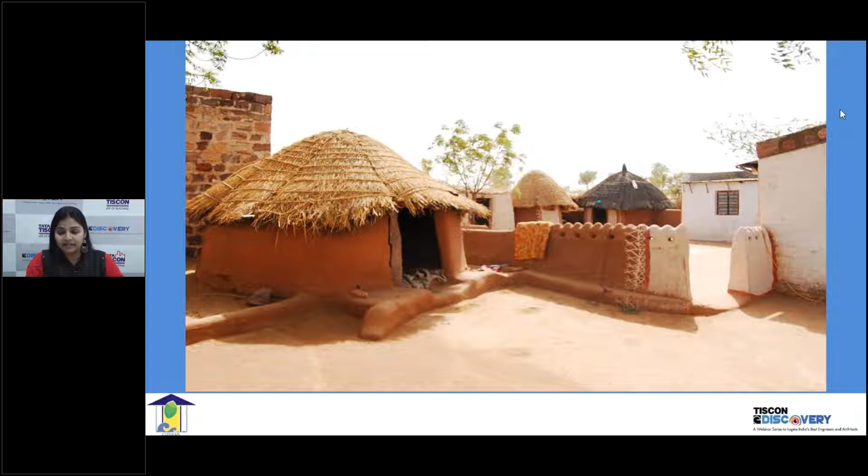These are our modern architecture buildings. We are taking time to identify this because of what you see here. If you look at the previous image, and I say that Hawa Mahal is probably in Srinagar, you will say that I've gone out of my head to say that. Unlike for this building, we can debate for hours saying this is from Mumbai, Sri Lanka, Singapore, any place. Let's go inside today and see whether these buildings are really comfortable or not.

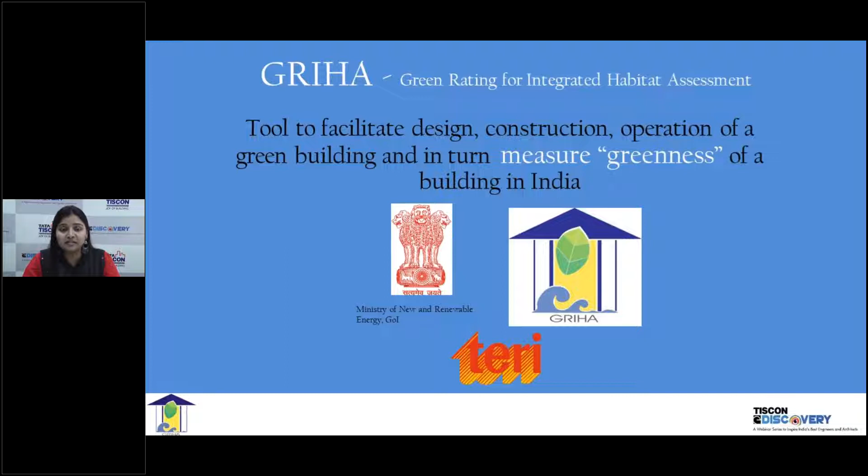When we conceptualized GRIHA, we based ourselves strongly on the existing codes and bylaws that we had. TERI, the Energy and Resources Institute, had conceptualized this rating system, GRIHA. GRIHA stands for Green Rating for Integrated Habitat Assessment. Basically, it is a point-based rating tool that will help you design, construct, operate, and measure the greenness of your building, and the council that monitors and administers all this is the GRIHA Council.

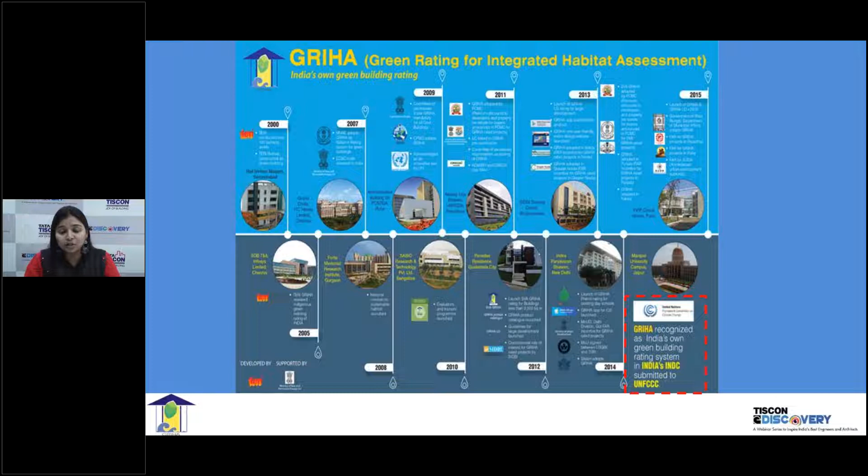If you look at the timeline, we've seen fabulous progress, with a lot of municipalities, municipal corporations, and state bodies adopting and endorsing the rating system. But I'd like to draw your attention to the bottommost item, the INDC document—the Nationally Determined Contribution. Every year there's a conference, and now we are in the 26th year.

So COP 26 is going to be happening soon, where every country makes a commitment. In 2015, India made a commitment by signing the Paris Agreement, stating we would reduce our carbon emissions by 35% from 2005 levels. When they said that, they highlighted only GRIHA—I want to emphasize they highlighted GRIHA as the national tool through which they would reduce emissions from the building and construction industry.

Depending on the scale of your project, you can register in any of the variants of GRIHA. For new buildings, we have 4 categories: SVAGRIHA, GRIHA for large developments, and GRIHA for affordable housing, based on the PMAY scheme of the Government of India. In the existing building segment, we have GRIHA EB—EB stands for existing building. We also have a specially designed rating system for day schools, and GRIHA for cities, covering civic bodies governing towns, industries, and existing and new settlements.

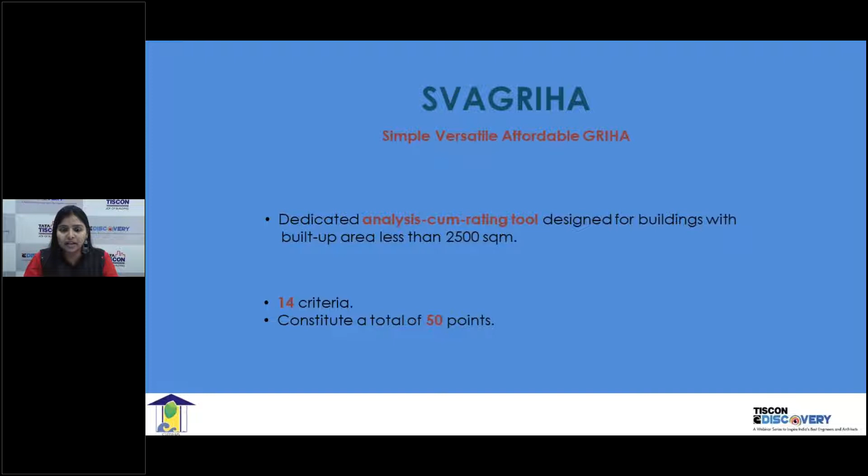Let's quickly understand the rating process. One has to register the project online on our website, www.grihaindia.org. Once you register the project, you get an option whether you want an orientation workshop or not. With the entire team, we sit and discuss all 14 criteria and the targets the project aims to achieve during this workshop. Then one has to submit the documents online, and a final visit is conducted on site to verify whether what you committed on paper has actually been executed on site, and then you get the final rating.

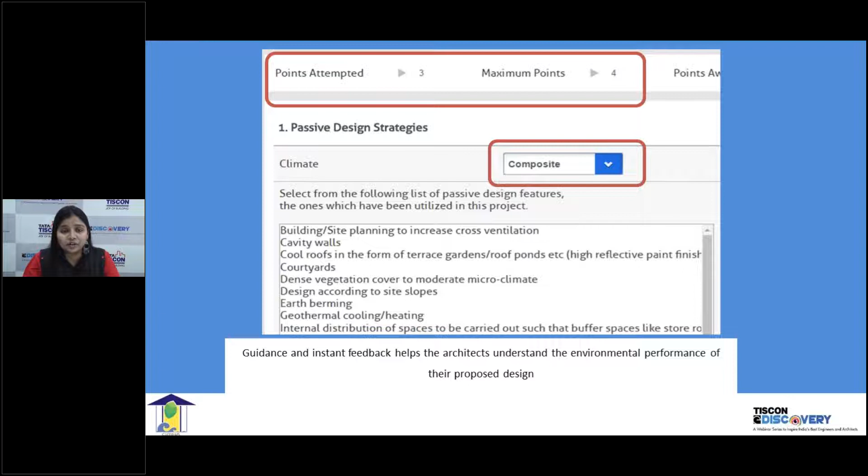Suppose you're confused about what kind of passive design strategies you need to implement, it's very simple. On this tool, you just select the climatic zone and you get a list of design strategies that you can implement in your project.

So these are the broad sections, 5 sections that we have, and this is the scoring. Now the catch here is, unlike in GRIHA, the main rating system where we have mandatory clauses, here we don't have mandatory clauses, but we have mandatory points. For example, in landscape, the total point weightage is 6 marks, and you got to score at least 3 marks, which means that out of 50, your project needs to qualify for at least 25 marks. Then depending on the scoring, you get either 1 star, 2 star, 3 star, or the highest, 5-star rating. When you score above 46 marks out of 50, you get a 5-star rating.

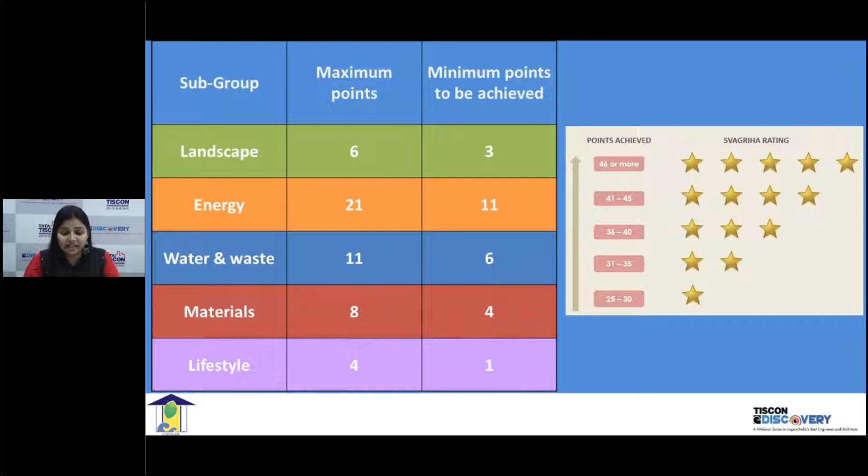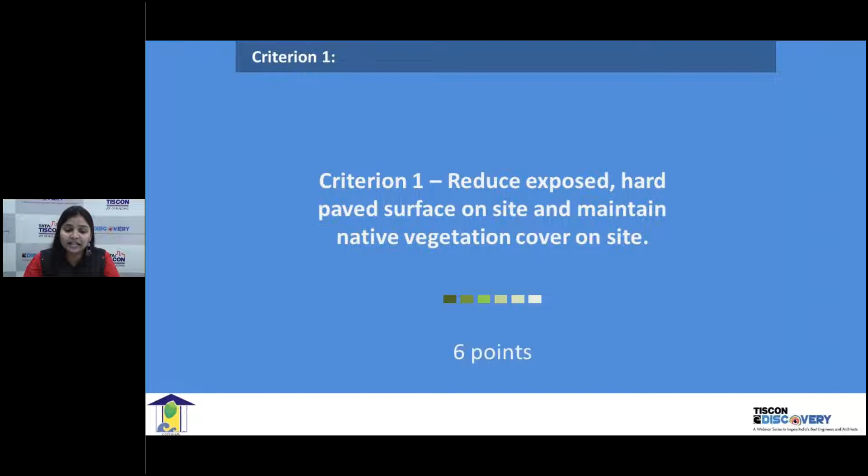Now should we move to the actual section? Let's talk about landscape. The first criterion talks about reducing exposed hard paved surface on site and maintaining native vegetation cover on site. This is for the obvious reason that we want to reduce the urban heat island effect.

What is this UHIE effect? We have experienced this, that in cities everything is concretized. In the daytime, these concretized surfaces absorb the heat, and at night they radiate it back. When you compare the day and night temperatures with peri-urban areas, due to lack of vegetation, water bodies, and these sponging areas, you will see a temperature difference of 3 to 10 degrees. It's a very common phenomenon in urban areas, and we have personally experienced it too.

Whenever we are looking for a parking area, we always look for shade, right? Why? Because the car is going to absorb all the heat, and then we sit in the car, and it's like a micro oven. The same applies to your project site also. We have to ensure it doesn't become like a microwave, but is a very comfortable area to live.

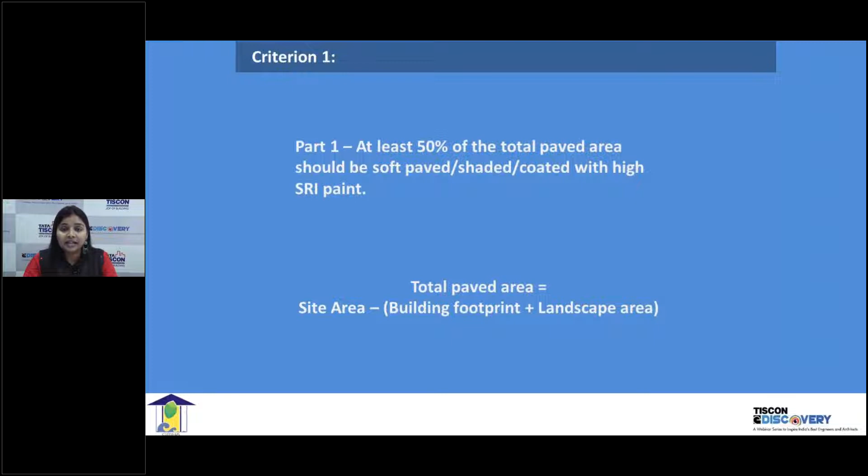For that reason, we say that at least 50% of the total paved area should either be soft paved, shaded, or coated with high SRI paint. SRI stands for solar reflectance index. How do you calculate the total paved area? It's very simple: you take your entire site area and subtract the building footprint area and the landscape area. Whatever area is left over should either be shaded or have high SRI paint or coating on it. This is a beautiful example where the driveway has been shaded by the native trees already existing on the site. Now you have to be very logical.

In GRIHA, we haven't invented anything new. It's a framework which tells you to be a little more logical in what you do. Now this is a car park area. I don't need hard paved area in the entire car park area, only my tires need to rest on the hard paved area. So this is a beautiful example where the rest of the area is grass, and only where the tires are going to land is a hard paved area. That's how you balance your hard and soft paved area on the site. Again, a beautiful example of grass pavers being seen on the slide.

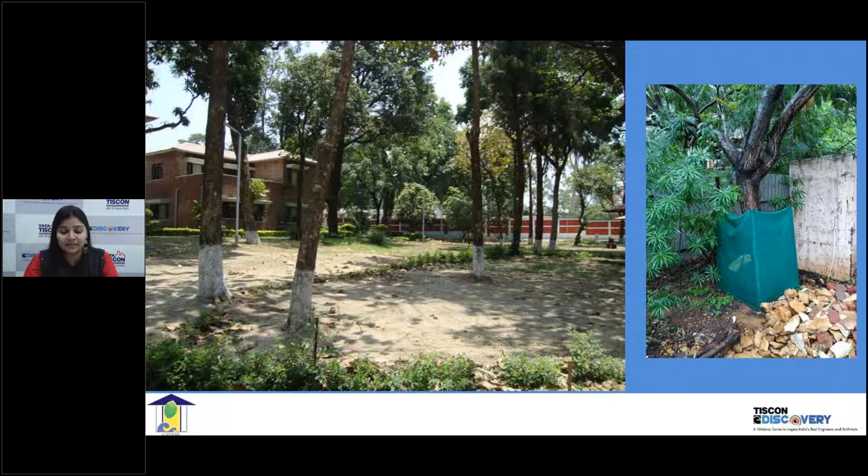Now, the second part of the first criteria, which has a weightage of 4 points, is where we say that you preserve and protect trees on site. If you have existing trees on site, during construction you have to ensure that you're protecting each and every tree existing on your site. Now, if you don't have trees, that means you've got to plant new trees because you have to maintain the microclimate of your own small plot. Depending on your site area, if your site area is less than or equal to 250 square meters, you need to plant 2 trees. And depending on your site area, you need to plant additional trees on site. You have to plant native trees because the water consumption for native trees is almost negligible compared to exotic species.

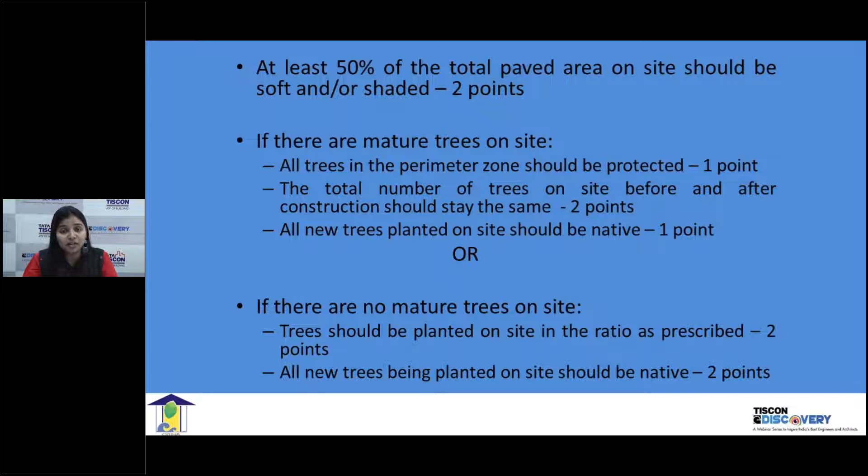Now we'll just quickly recap. When you treat your hard paved areas, you get 2 points. When you preserve your mature trees on site, you get 2 points. And if there's additional tree plantation done on your site, you get an additional 1 point, making it a total of 4. And if there are no trees and you're planting more trees on your site, you get 4 points.

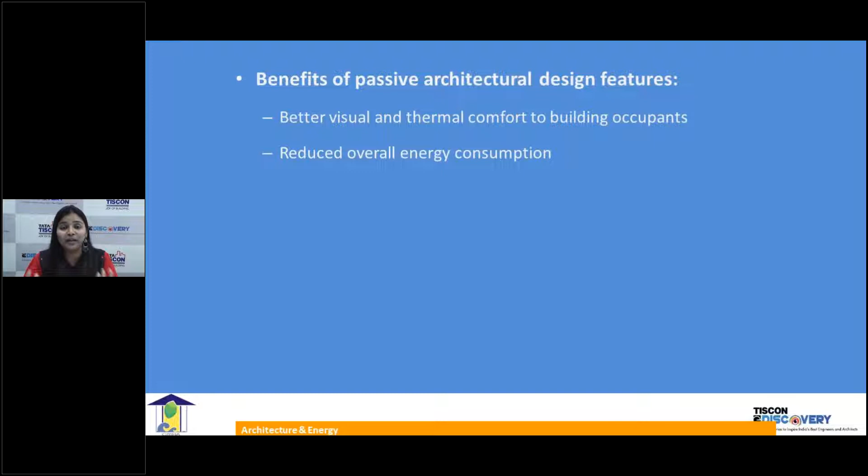With that, we move to the architecture and energy section. Now we are going to talk about passive architectural design and systems, which has a weightage of 4 points. Why are we going to have passive design strategies integrated in our design? So that we have better thermal comfort and reduce our overall energy consumption. We also talk about low energy heating and cooling systems for the same reason, that thermally the occupants need to be comfortable.

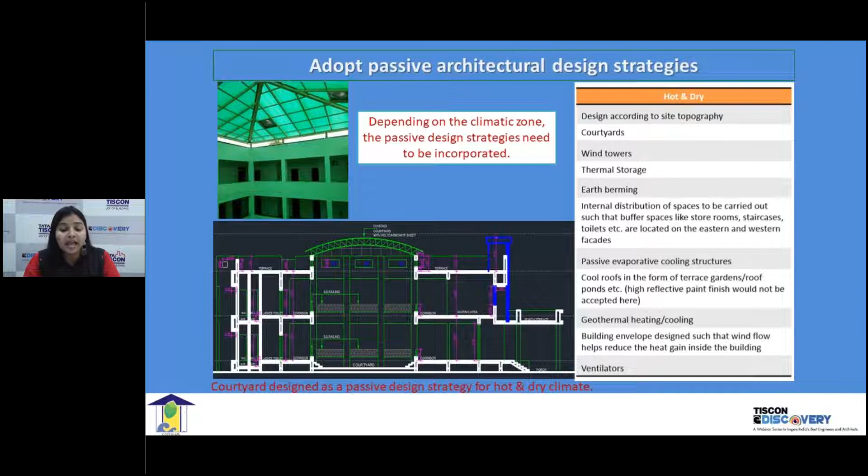Now the tool, as I showed you in the previous slides, will prompt you with design strategies. If we take an example of hot and dry climate, the strategies have been listed down. You can have a courtyard, wind towers, earth berming, and all of this can be integrated in your design, which will fetch you 2 points.

Now, this is the internal courtyard being designed to ensure natural ventilation happening, with a green living wall. This is a very beautiful GRIHA project in the northern part of the country. If you look at this building, it has got pergolas and beautiful balconies which provide shading, and I want to draw your attention to this detail. These are inverted pots laid during the slab casting, which thermally makes the building more comfortable and reduces the load on energy consumption.

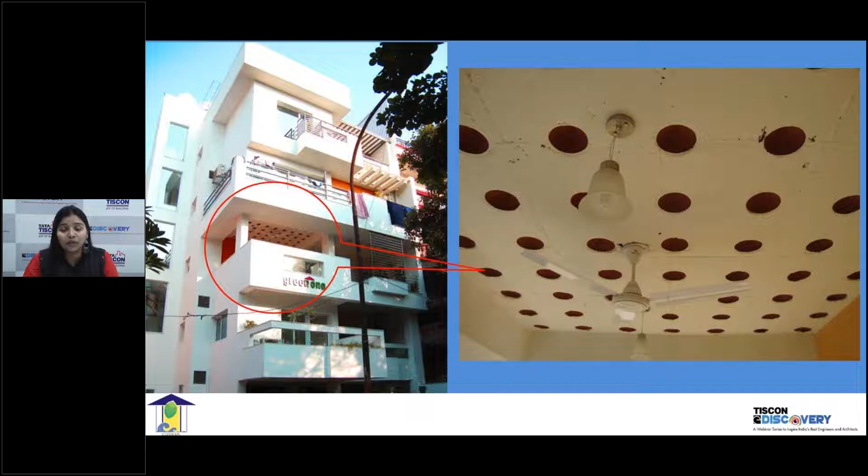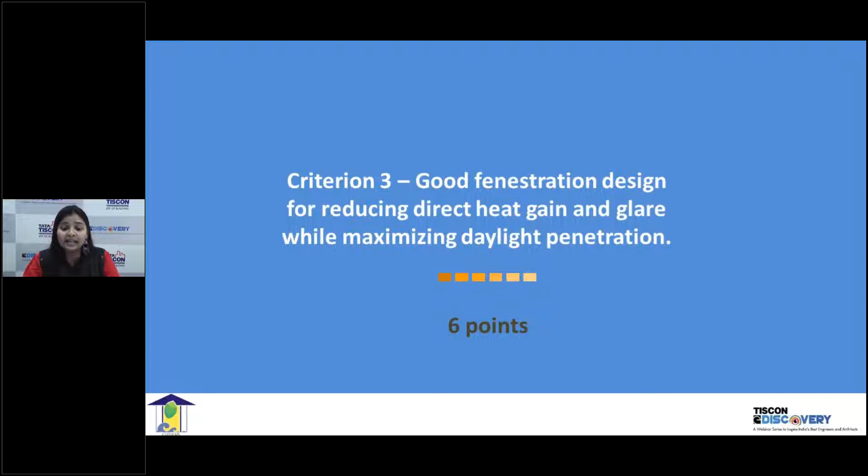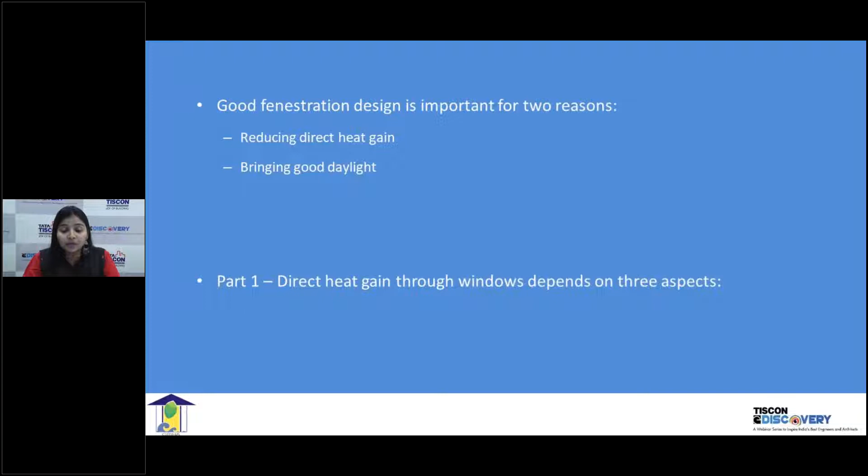We move on to criterion 3, which talks about good fenestration design for reducing direct heat gain and glare while maximizing daylight penetration. The point weightage here is 6. We need good fenestration design for 2 reasons: to cut down direct heat gain and to bring good daylight inside. How do we do this? This depends on 3 aspects: first, how have you oriented your windows; second, how are you shading your windows; and third, what is the glass specification you are giving. These are the 3 major aspects which will determine how much heat is going to come inside your building.

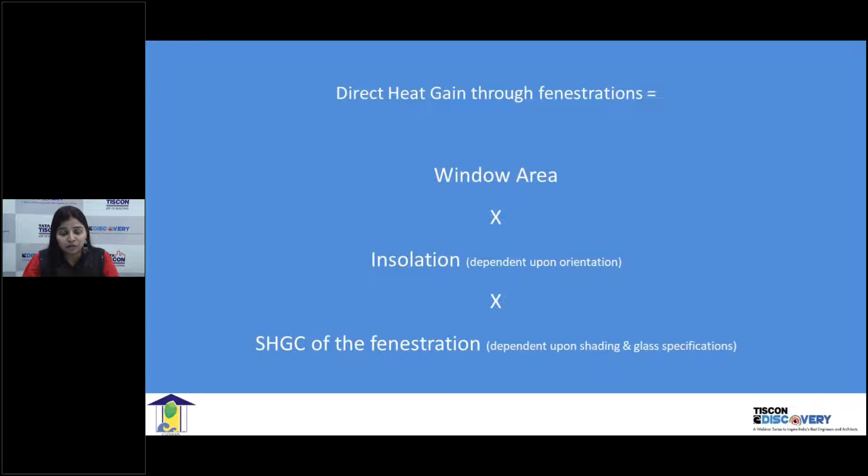Now the formula to calculate this is very simple. So your window area into the insolation number into the SHGC of the fenestration. Now insolation numbers you can get from SP41. It is a special publication from BIS, Bureau of Indian Standards. And SHGC is the value that you'll get from the manufacturer. SHGC stands for solar heat gain coefficient.

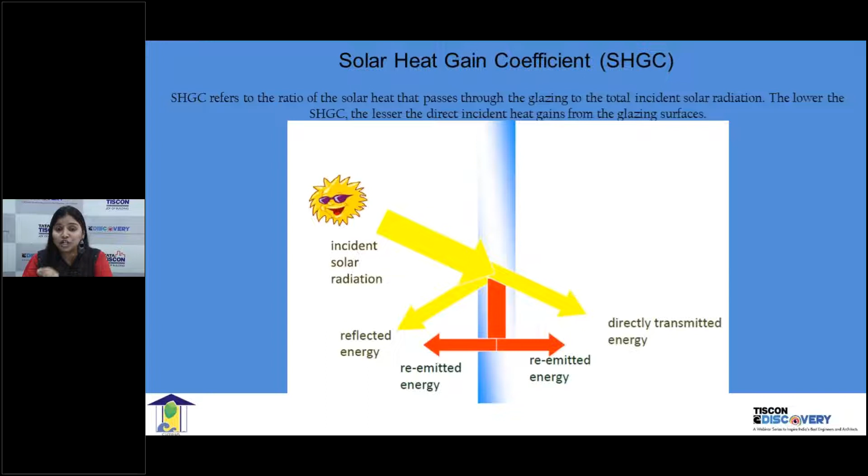Now to simply explain, SHGC would range somewhere below 1. So it's a numerical number below 1. Now if I say that the SHGC of the glass is 0.45, it means that if outside the radiation is 100%, your glass is allowing only 45% inside. So 0.45 is the factor, solar heat gain factor, which means that 45% of the solar radiation is going to enter the space.

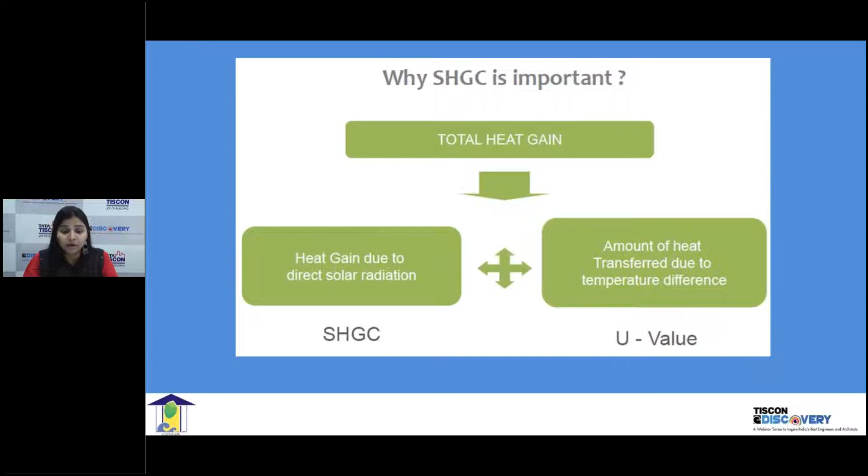Now we have also heard about the term called U value. Now what is U value? U value is the rate of heat flow through a unit area building component through an overall unit temperature difference between the outside and the inside temperature. Now I'll explain with an example what is more important. Generally you have heard architects and designers talking about the U value, but the SHGC value is being emphasized more and not the U value. Why? Because the SHGC has got more impact when you're designing the fenestration.

Let's see here. Now, if the solar incident energy is 800 watts and the temperature differential is 20 degrees, inside I'm having a temperature of 18 degrees and outside my temperature is, say for instance, 38 degrees. Then if I look at the SHGC of the glass, which is 0.3, which means that 30% of the heat is going to come inside. So 0.3 into 800 is 240 watts.

And if we look at the U value of the glass, which is 3, the difference in the temperature is going to allow some amount of heat to come inside my space. So 3 into 20, which is 60 watts. So total heat gain because of the window design and the glass specification is going to be 300 watts. So my SHGC plays a major role more than the U value.

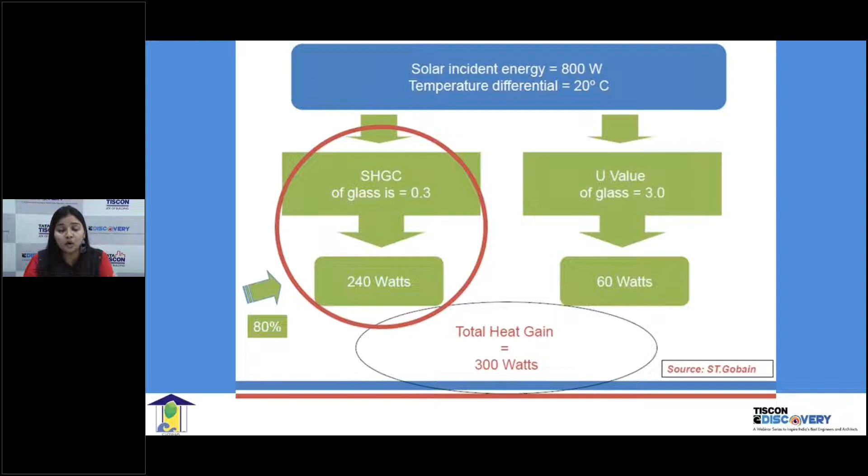So when you are designing your window, you do emphasize on the lower SHGC. And then you can beautifully design your windows if you know what shading device needs to be in place and what is the glass specification that you're going to have.

Now, can you quickly tell me which is a good option? Is picture 1 a good option to design or is picture 2 a good option to design? And we have got 3 seconds for this. Oh, 1, 2, 1, 2. Oh my God, so random I'm getting the answers. Superb. So everybody is active. Thank you so much. So let's see which is a good option.

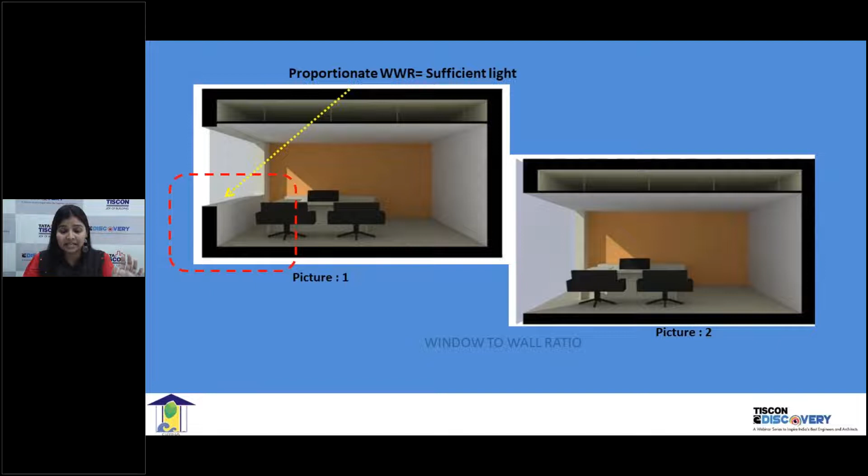So here in the first picture, we have the WWR. Now what does WWR mean? WWR is window to wall ratio. So in the first image, if you see, I want to have the daylight on my working desk. So in the first image, it is very brightly coming on my desk. In image 2, the light is also coming on the floor. That means with daylight, I'm also inviting excess of glare, which is not required.

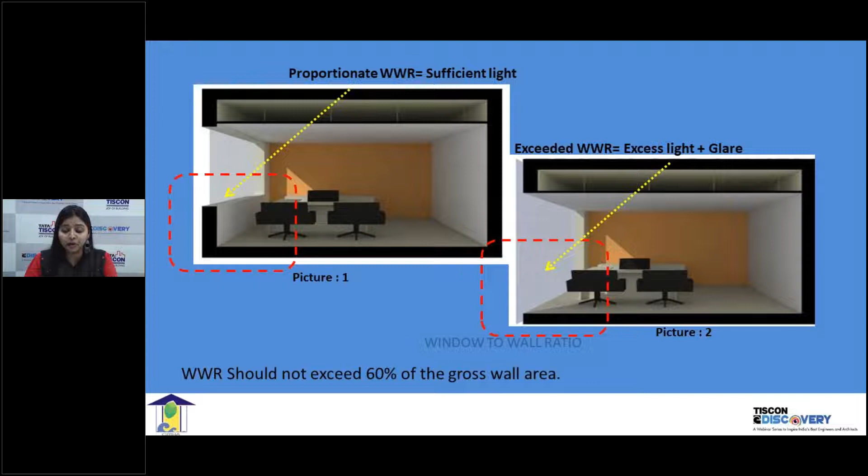So in GRIHA, we say that the window to wall ratio should not exceed more than 60% of your gross wall area. Now, this is again mandatory in ECBC. So as I said in the beginning, there are codes and bylaws that we have already integrated in the GRIHA rating system, which made it so easy for the government agencies to endorse and adopt it.

So what is mandatory here? That you have to have your window to wall ratio less than 60% and your SRR, skylight to roof ratio, should be less than 5%. And then depending on how much reduction you're showing and how much is your daylight zone percentage, you get points. So the maximum points one can achieve here is 6.

Moving on to criterion 4, which talks about efficient artificial lighting system, you get 2 points over here. Now here you have a direct benefit. It's very logical that if I have efficient systems being installed in my house, I'm going to have direct energy savings and my light bills, my energy bills are going to go down.

So here there is something called LPD. So one has to calculate the LPD, don't get confused, light power density. Here it is very simple. The total connected load of your artificial lighting needs to be divided by your built up area. And this has to be lesser than what has been prescribed in GRIHA. Again, it is as per the ECBC norms.

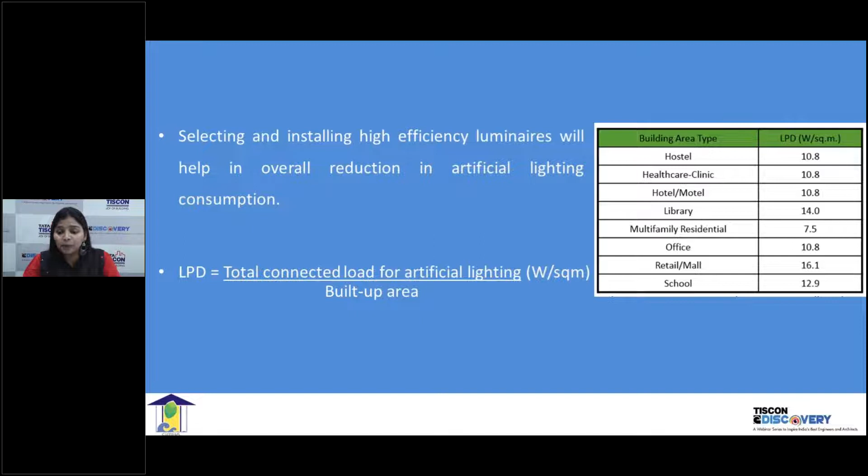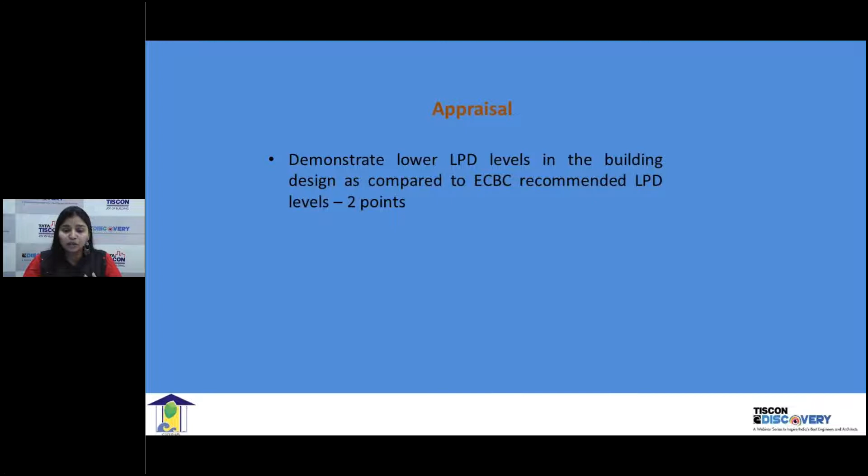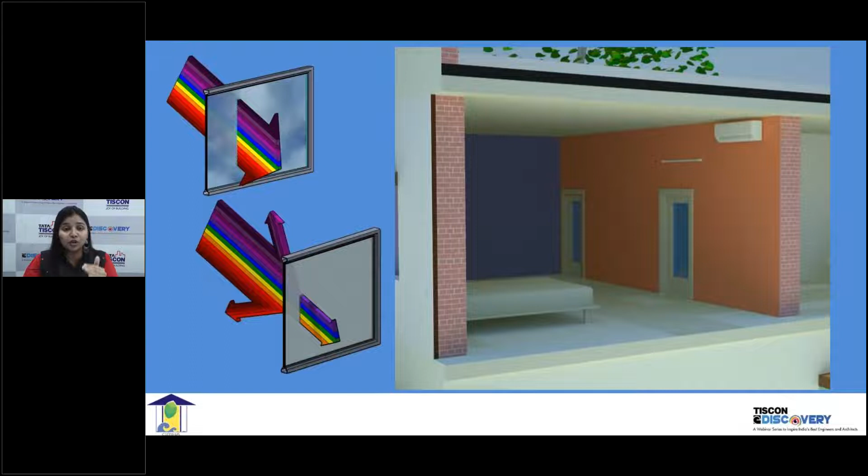Now moving on to criterion 5, we are talking about thermal efficiency of building envelope, where you can score 2 points. Now, the better the thermal efficiency, the better is the thermal comfort of the space. The thermal efficiency again depends on 3 aspects. One is your wall, second is your glazing, and third is the roof. Everything needs to be well insulated or well designed so that the thermal comfort is maintained. So this is the wall assembly, the glass specification, and your roof should also be insulated. When all of this is in place, then your requirement of conditioning or heating goes down drastically.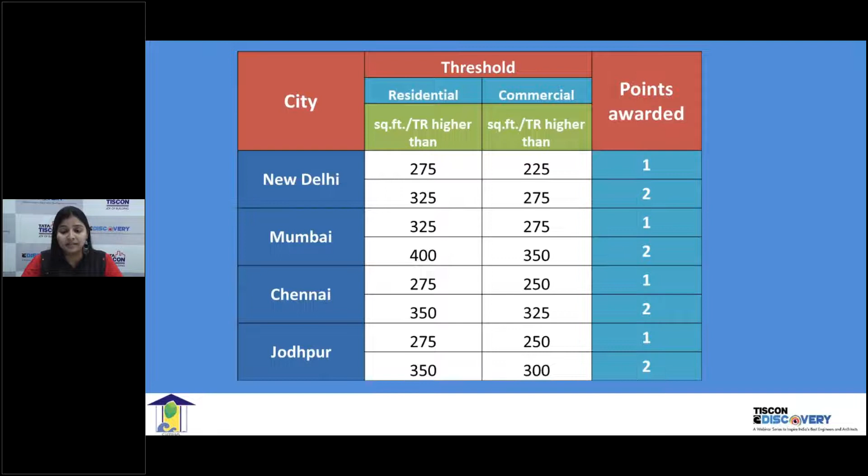Now, here in GRIHA, we have defined certain thresholds. Suppose if you are talking about a case of Mumbai, then your threshold is 325 square feet per TR. If I have to put it simply, it means that whatever conditioning system is being designed, in 1 TR I should be covering 325 square feet area. Now, if my building is very well designed and the thermal efficiency is very good, instead of having 1 TR requirement for 325 square feet, I can go to 400, 450 also. So the more area gets covered, that means very efficiently your building has been designed, and you get maximum points under this. So maximum one can get is 2 points over here.

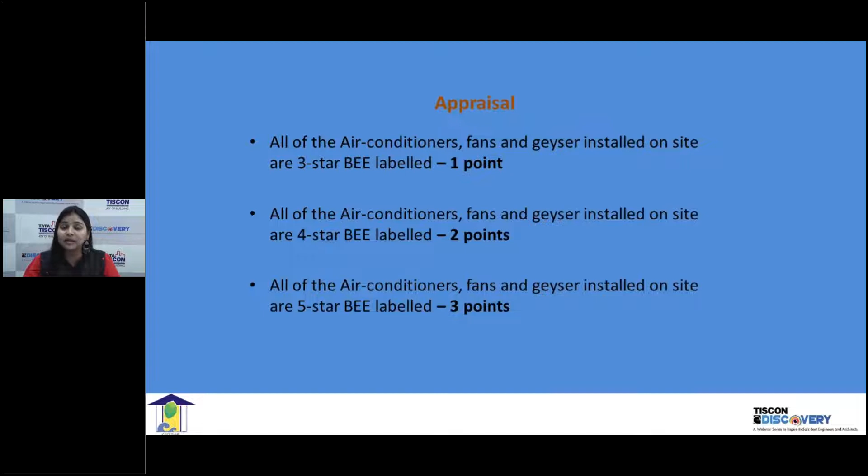Moving on to criterion 6, use of energy efficient appliances. You get 3 points here. Here we are promoting BEE star rated appliances. So your fan has to be BEE star rated, your air conditioning system, and the geysers. So now here, all of the 3 installed should be at least 3-star rated. Now, if you say I have 10 fans, out of which 2 are 5-star rated and 8 are 3-star rated, then you will get 1 point. Here, the word all is very important. All your appliances should be either 3-star, 4-star, or 5-star, depending on what point score you are targeting. So if everything installed in the house is 5-star rated, you get the full marks, which is 3 points.

Now we talk about use of renewable energy on site, which is criterion number 7, where you can fetch 4 points. Now, depending on the built up area, you have to have minimum sizing of the RE system. So in SVAGRIHA, the maximum eligibility of the project in terms of built up area is 2,500 square meter. If you cross this built up area, then you have to register your project under GRIHA, which is the main rating system where you have 31 criteria instead of 14.

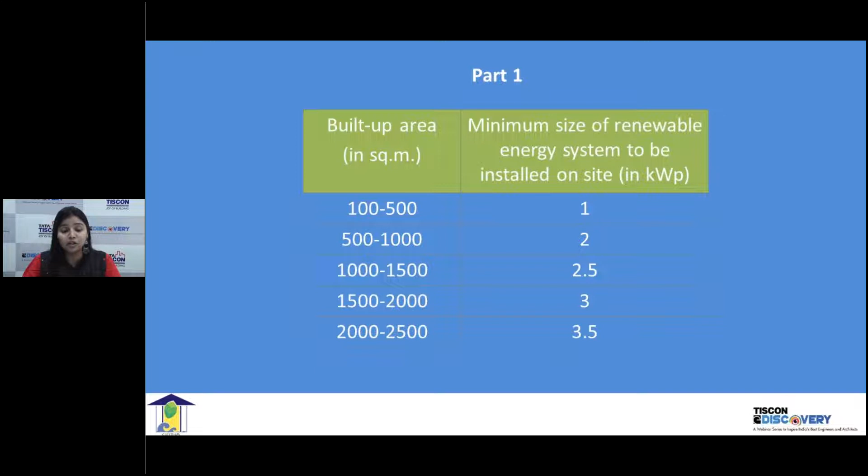And if it is more than 75%, you get the full 2 points. If it is equivalent to 50% or more, then you get 1 point. And for PV system, for renewable energy system, you get 2 points. So total here we have 4 points in the rating system.

Now here there is a non-applicability. Now GRIHA, as I said, we are a very logical rating system. So we also have something called as applicability check. Now if something is not applicable to your project, that doesn't mean that your point scoring is going to get affected. Now in case it's an office building, then you do not have a requirement of solar hot water heating system.

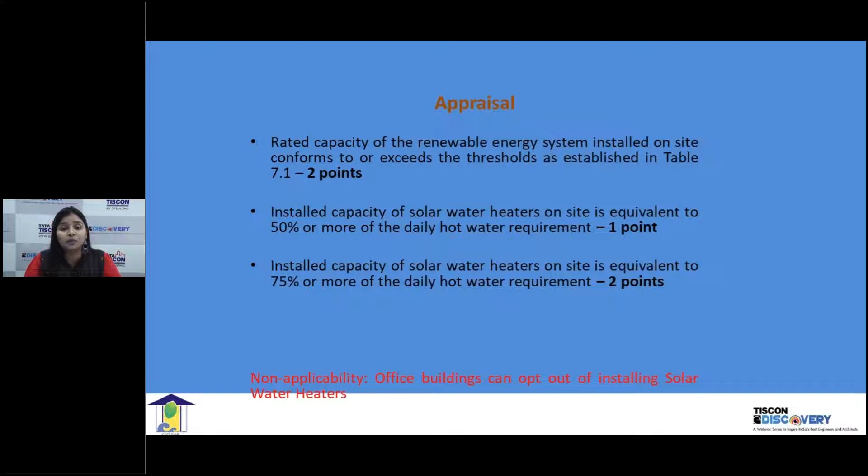So in that case, the 2 points get removed from the denominator. So now instead of getting evaluated out of 50 points, your project would be evaluated out of 48 points. So basically it's a percentile based rating system.

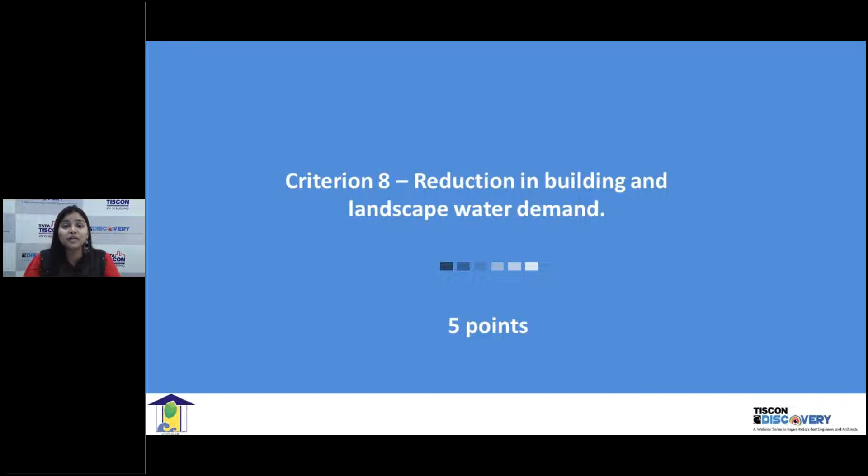Moving on to the next section, which is water and waste. Criterion 8 talks about reduction in building and landscape water demand, for which we have got 5 points. Now in GRIHA, we always make a base case for anything. So now in SVAGRIHA, these base cases have already been created in the tool, but I'd just like to highlight how we work on this. So basically your building is compared with a worst case of your own building.

So now in this case, if you see, we are talking about the landscape water requirement. Now your worst case or the baseline case is assuming that 100% of your landscape area is lawn. And we all know that lawn consumes maximum water, right? As compared to trees, mature trees. Have you ever seen somebody watering a banyan tree? No, probably, right? So that's why lawn is a worst case, and planting native trees is a good case for us, as a good practice.

So we don't say that you shouldn't have lawn at all. So you can have a combination. So as you see on the screen, in the proposed case, we have few native trees, we have native shrubs, we have a patch of lawn area also. Now the water requirement is calculated based on your base case. And this is all fed in the tool.

Now here the intent is to minimize your lawn area, maximize the tree cover, maximize the shrub area. Then grouping of plants can be done. So suppose your trees are going to consume very little water, you group them together so their water requirement can be calculated accordingly. Then we also encourage innovative concepts, like you must have heard about xeriscaping.

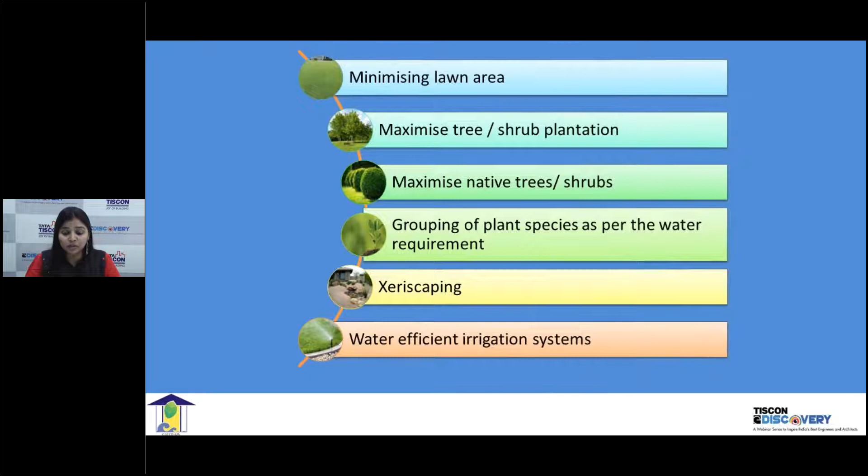Now talking about the water fixtures that are installed in the building. Do you remember seeing the first image of the 1970s?

There was this, I'm forgetting the name of the movie, but this kind of a system was shown in a movie, when I had to tell my kids, like, look, we had this kind of a system, and they were just laughing at me, mom, like, which part of the country did you belong to? But these were very, very cute little systems.

But if you look at the water saving potential, they were absolutely bad. Like in one flush, we would waste around 15 liters of water. And now we have some very efficient systems, like the dual flush, where your water requirement is drastically reduced to 50%. The smaller flush will just consume probably 3 liters or 2 liters, and the bigger flush would consume 4 to 6 liters.

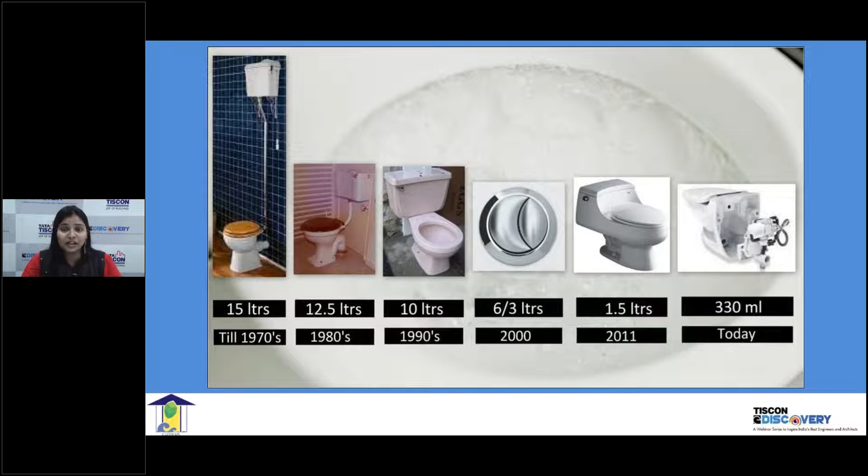But I was recently going through a research paper which has invented a system which just consumes 330 ml of water. Innovation is at the peak, and it's the need of the hour, because water is something that we are going to have the next war on.

So awareness is something that we need to create. You might have efficient systems in place, but if there is lack of awareness, these systems, these technologies really fail badly. So awareness is a key aspect, and that's why we all are here today, to understand what are the systems, what are the best practices.

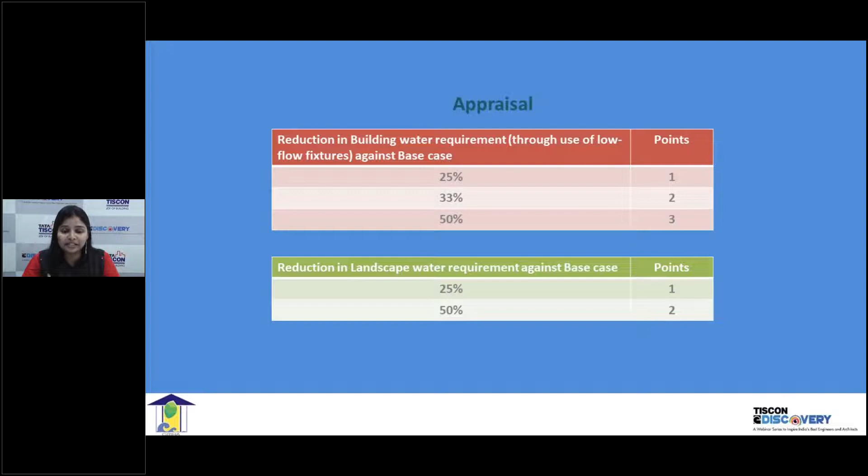These are aerators. This reduces your water consumption through taps almost 60 to 80%, and roughly they cost around 120 to 200 rupees per piece. So depending on how much percentage reduction you have achieved, you can get maximum 5 points, 3 points in your building water requirement, and 2 points for your landscaping.

Moving on to criterion 9, which talks about rainwater harvesting, you can fetch 4 points over here. Now the intent is very simple. I am staying in Navi Mumbai, where the corporation very proudly says that we supply 230 LPD, where the baseline or the norm says that 90 or 135 LPD is what you need to supply. My city supplies me 232 liters per day per person. Now that's a huge amount.

But if I look at Mumbai, which is hardly any distance from my place, they are having water shortage, they are having water cuts. Now here the intention is, when you're looking at a smaller footprint, we are trying to see how self-sufficient we can be. So here the intent is to ensure that at least you store water of your 2 days requirement. Now, how do we do that?

So rainwater harvesting basically can be looked at this way: you harvest rainwater to recharge your aquifers. Secondly, you can harvest the roof rainwater and store it in tanks so that you can use that water for secondary applications. And third, you recharge your wells so that it becomes a perennial source of water for your own plot or your own site.

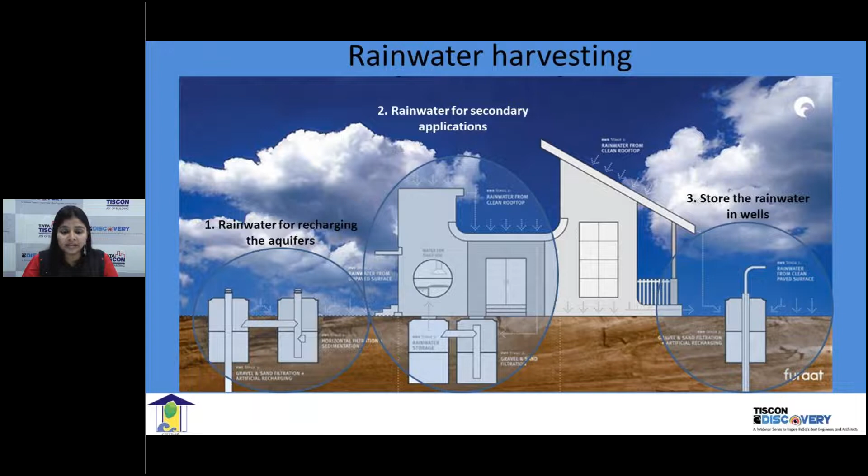Now, this is a very interesting system that I came across. The company is called Furaat, and they have come up with this precast modular step well. It is very simple, and I'm going to quickly show you a video so that you understand the system in more detail. This display.

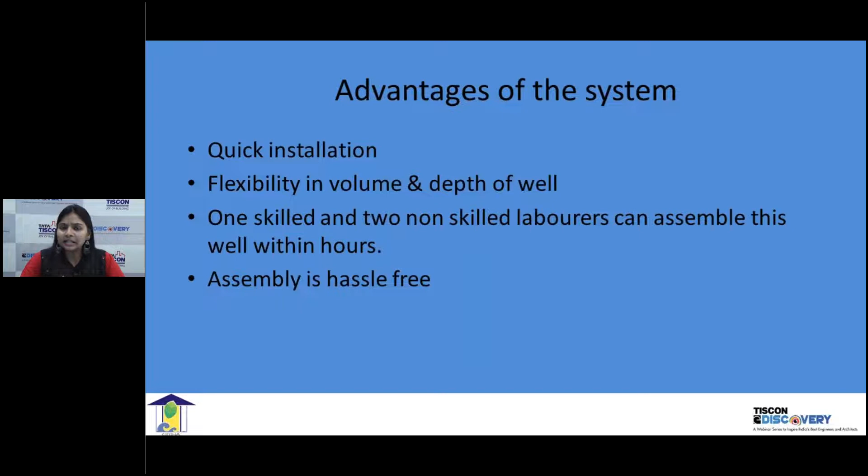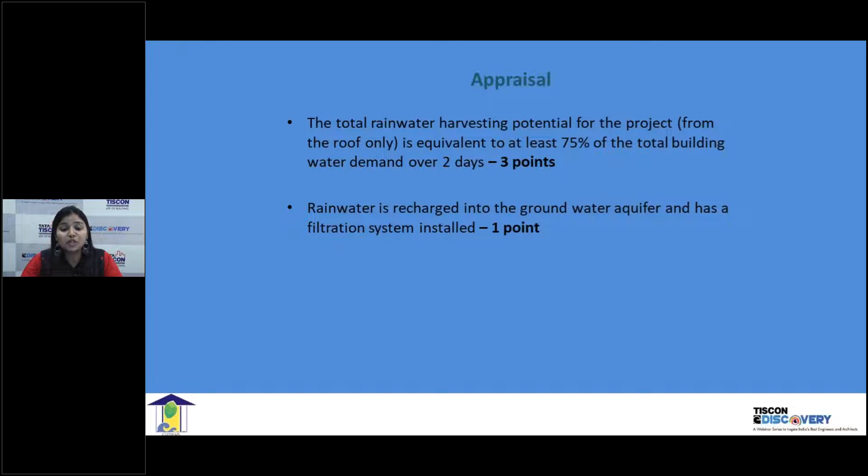So when you harvest the rainwater, the maximum points that we can get is 3 when you're meeting 75% of the total building water demand over 2 days. And when you're recharging the surplus rainwater that has been harvested, you get an additional 1 point. Now here again, non-applicability comes into the picture.

It's logical that if your groundwater table is high, you are not advised to recharge the ground. So these points become non-applicable to your project.

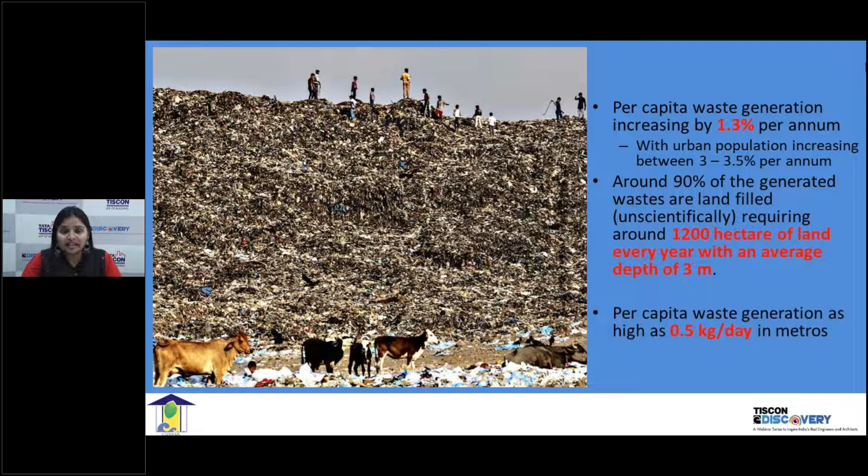Moving on to criterion 10, it talks about generating resource from waste, which has got 2 points. We used to generate 0.38 kgs per person, but now our lifestyle has changed so much. With just a click we order products from Amazon, and with that comes so much packaging and waste that now in metros, per person waste generation is almost half a kg. If you look at the landfill sites, we are just building mountains.

So in GRIHA, what we promote is that you recover a resource out of this waste. You can either practice composting at your place, or at a larger scale, have a biogas plant. If you do so, you get 2 points. The intention is zero waste generation through adoption of requisite strategies, which will fetch you 2 points. There's a non-applicability here if it's an office building, since you're obviously not going to generate that much organic waste to want a system installed. So these 2 points become non-applicable in an office setup.

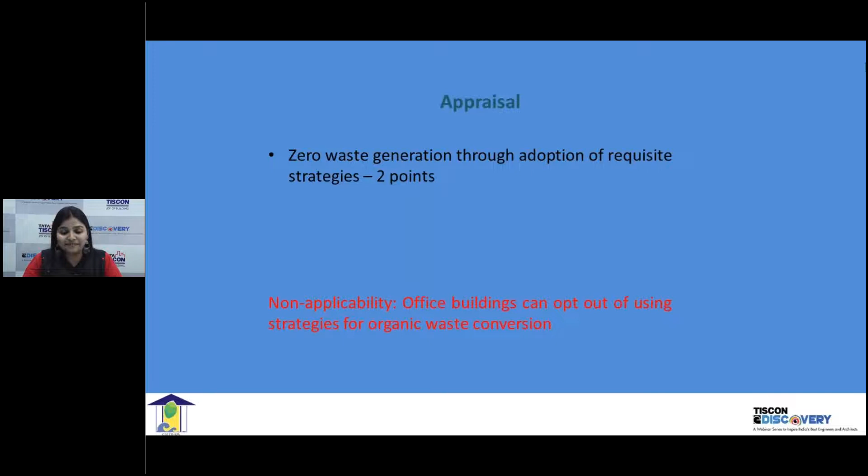Moving on to materials. Criterion 11 talks about reducing embodied energy of the building, which will give you 4 points. Embodied energy means the energy that has gone into making the product, material, or technology, right from extraction to its processing, transportation, use, and disposal also. So the entire energy cycle is basically the embodied energy of that material.

To give you an interesting example, very close to my house there is this Govardhan Eco Village in Thane, a little ahead of Thane. Being a village, they had a lot of infertile soil, so they decided to make the building blocks from this infertile soil. That is what is called CSEB, compressed stabilized earth blocks. When we compare the embodied energy of this CSEB block with a conventional red brick, you will be surprised to see the figures: the embodied energy of CSEB is just 0.275 megajoules per kg, as against a red brick which is 72.3 megajoules per kg.

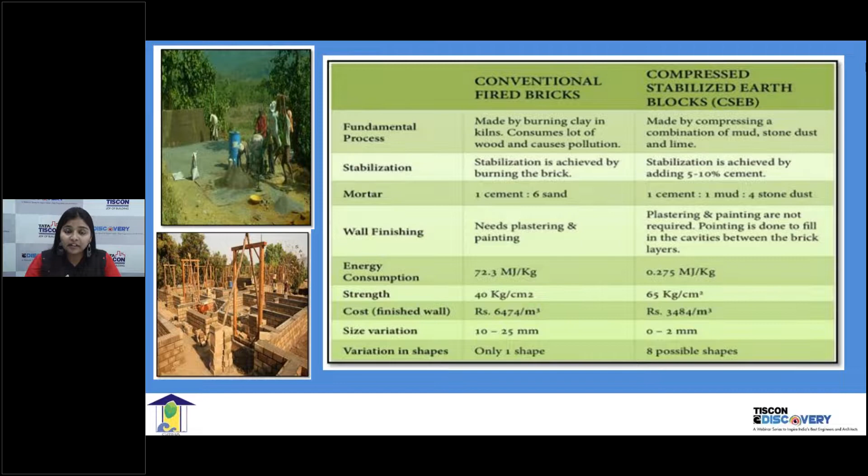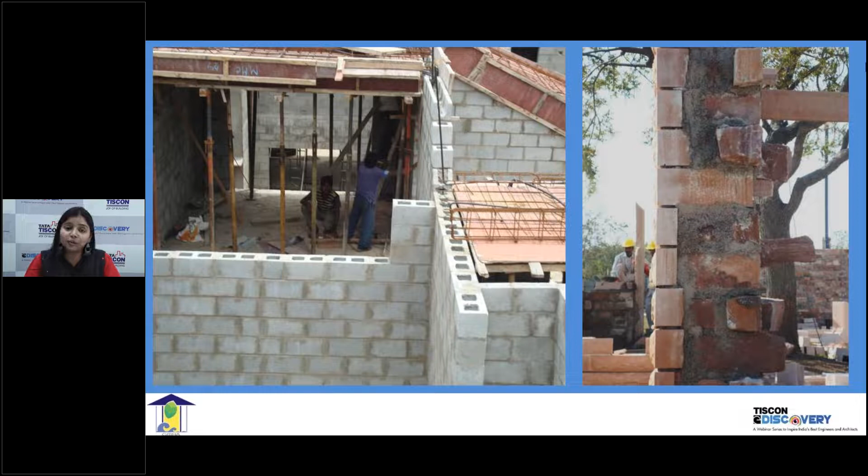So the intention is that you use an alternative material which has lower embodied energy values. Hollow bricks, or if you're using local stone, will have lower embodied energy because it is procured and processed locally. So the amount of energy going into making that material is going to be much less compared to a red brick. Even if you have certain technologies or techniques that ensure you're reducing the volume of steel and concrete, that is again going to reduce your embodied energy of the structure.

Just to give you a simple example, a study was done to analyze the saving in material if we just change the laying of bricks. We've heard of English bond or Flemish bond, which is regularly how a masonry wall is constructed. As against that, if I use a rat trap bond, look at the percentage saving. I can save 20% in the volume of bricks consumed, and in terms of mortar, I will have 39% saving. Just by changing the specification of laying the bricks, I'm having so much savings, which will indirectly mean I'm reducing the embodied energy of my building.

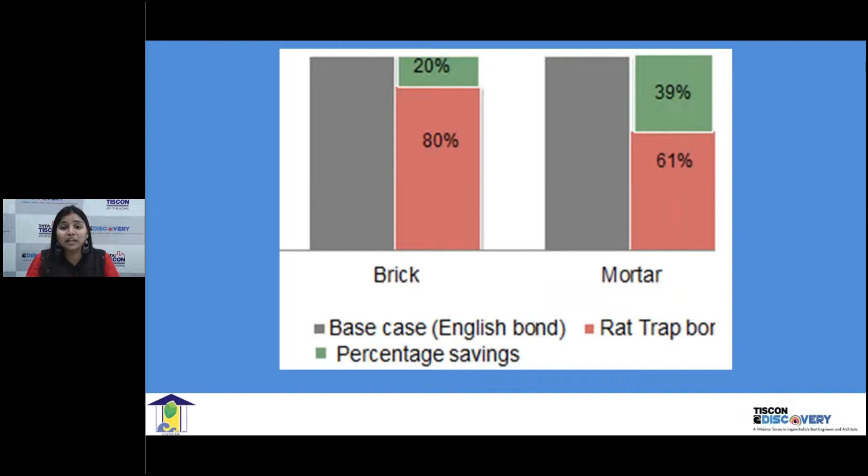Now here we say that one has to use 100% PPC in the construction. PPC stands for Portland Pozzolana Cement. Pozzolana means it is an industrial waste, commonly known as fly ash, which is added in this cement. So when you use that, you're reducing the pressure on the landfill site, since otherwise this would have gone to the landfill site. There are certain materials approved by BIS to be used in the construction industry, like slag and fly ash. So these kinds of materials, if used in your structure while building your bungalows, are going to have a lesser impact on the environment.

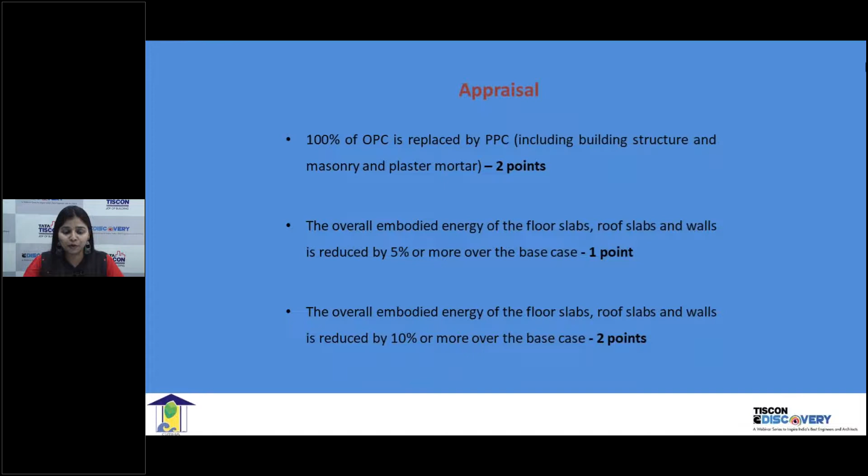So when you reduce your embodied energy of your building by 5% or more, you get 1 point. And if it is about 10%, you get an additional 1 point, making a total of 2. For using only PPC in your structural concrete, you get 2 points, and of course in your masonry and mortar also.

Moving on to the interiors, we say that you have to use low energy materials, and for that you get 4 points. Here we talk about two things. First, all your interior finishes, including your flooring, paneling, partition, and false ceiling - everything has to be low energy material.

And then we talk about the paints also. The paints, adhesives and sealant should be lead free and low VOC. VOC stands for volatile organic compound. You must have experienced when you enter a newly painted room, you get a very strong smell - that is the VOC content that irritates your throat and eyes. It has a health impact: you feel dizzy, your head starts aching. So we are promoting materials with low energy impact that also don't affect the comfort of the occupants.

Now, what are low energy materials? Any material which has got more than 10% of waste content in the main manufacturing process is considered low energy material for us. All stones from India are considered low energy material, and of course renewable materials like bamboo, engineered wood, and cotton are also considered low energy material.

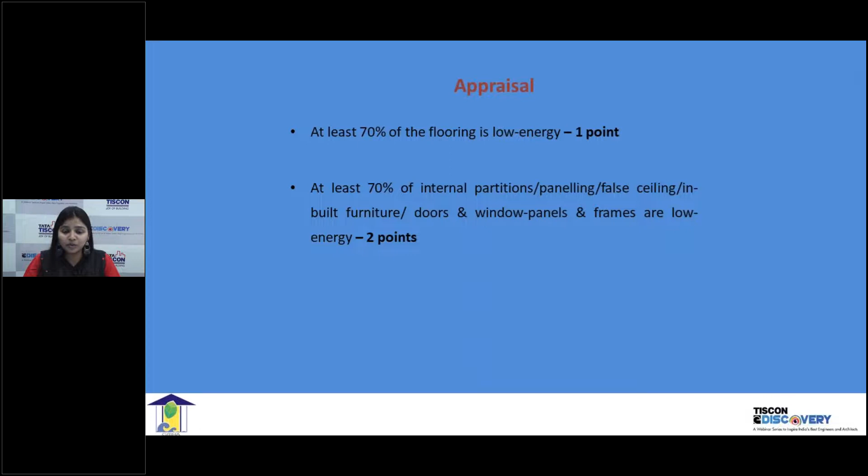So if at least 70% of your flooring is low energy, you get 1 point. Then for the rest of your finishes, if more than 70% is low energy, you get additional 2 points. And for paints, you get 1 point.

Now moving on to a very important aspect of lifestyle, criterion 13 talks about adoption of green lifestyle, where you can fetch 4 points. Here we talk about how you limit your built up area depending on the kind of structure you're constructing. If you're constructing a residential place, then per person your built up area should be between 12.5 square meters to a maximum of 50 square meters. So here we are trying to say, okay, you have a lot of money, a lot of land, that doesn't mean you lavishly build - you try and optimize your resources.

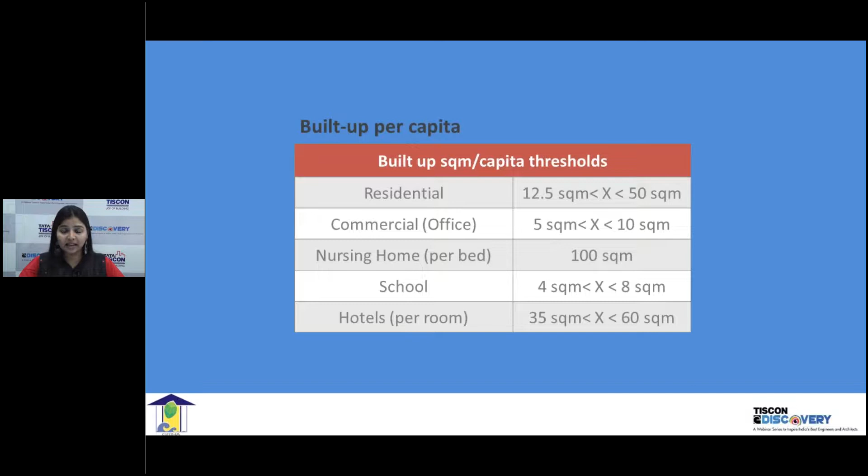Second, we talk about distances to be traveled for your basic services. We encourage selecting a site closer to these basic amenities - just to buy milk, I shouldn't have to start my car and travel 3-4 kilometers for basic necessities. So we say that the total expected distance traveled to basic services in a year should be less than 2,100 kilometers - that's 2,100 kilometers per year for residential, and 2,000 for non-residential. If you prove so, you get 1 point.

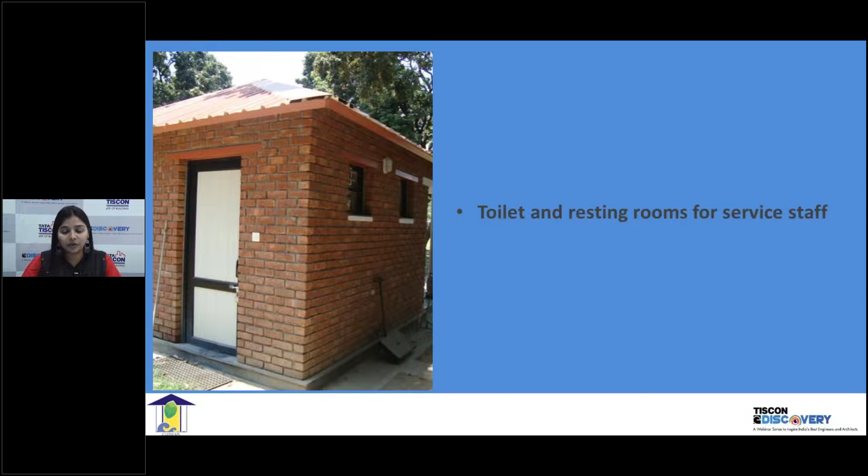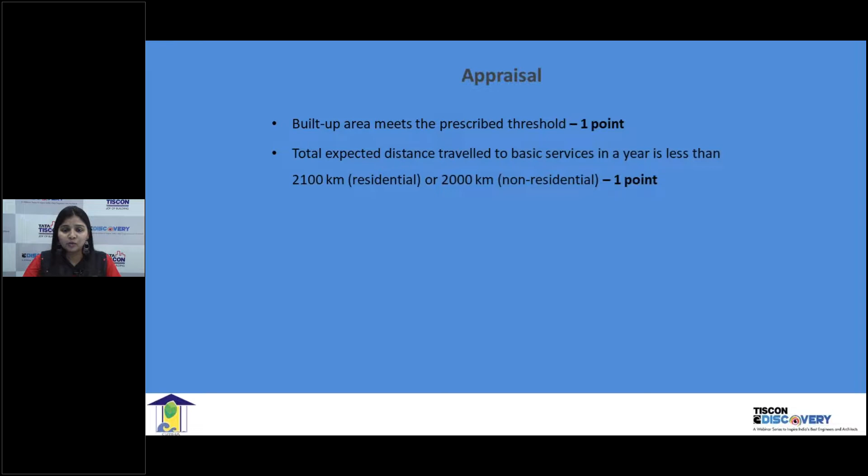Then in GRIHA, nothing directly related to greenness of your building, but on the social aspect, we say that for your service staff you should have a dedicated resting room and a toilet, for which you get 1 point. For creating awareness, you get an additional 1 point. Suppose if it's a bungalow and you can't really create awareness, but if kitchen gardening is being practiced, then for that also you get a point. So for built up area that meets a threshold, you get 1 point, and for basic amenities within your site premises, you get 1 additional point.

Service staff, if you have a dedicated toilet and a restroom, you get an additional 1 point, either for environmental awareness or for kitchen gardening that you're doing, you get 1 point. So total, we have got 4 points over here.

The last criterion is innovation. Whatever we have spoken about for 45 minutes, anything you do in addition to that, you get 2 points. What can be done? Probably you can have sensors so that you optimize your resources, an electrical charging point, or an e-vehicle. So anything not said in the 13 criteria can be implemented and practiced here in criterion 14.

Now, this is the whole list of 14 criteria, the maximum and minimum points that one needs to get, and the star rating that you can have.

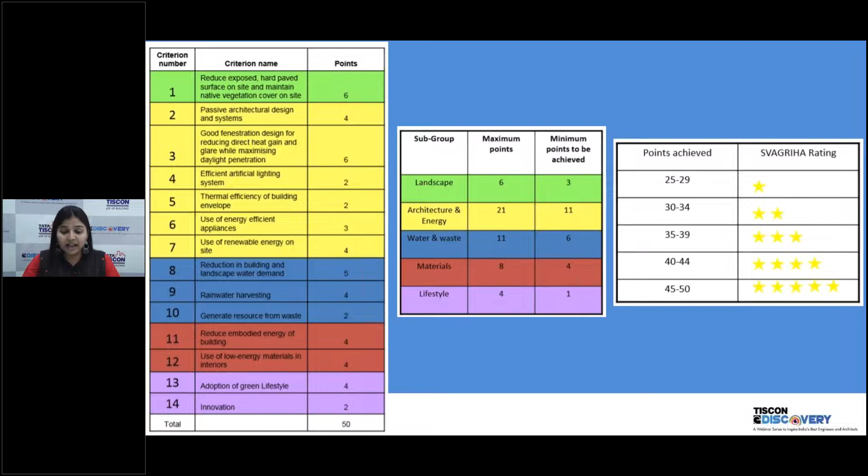Now, the two important questions we discussed at the start: do we have to do additional work? I'll be honest with you, yes, a little bit. But if you look at GRIHA, it is in sync with the local bylaws, with the national codes, and the environmental clearance processes. Of course, EC clearance is for bigger projects, but I wanted to highlight that we are in sync with the bylaws and codes.

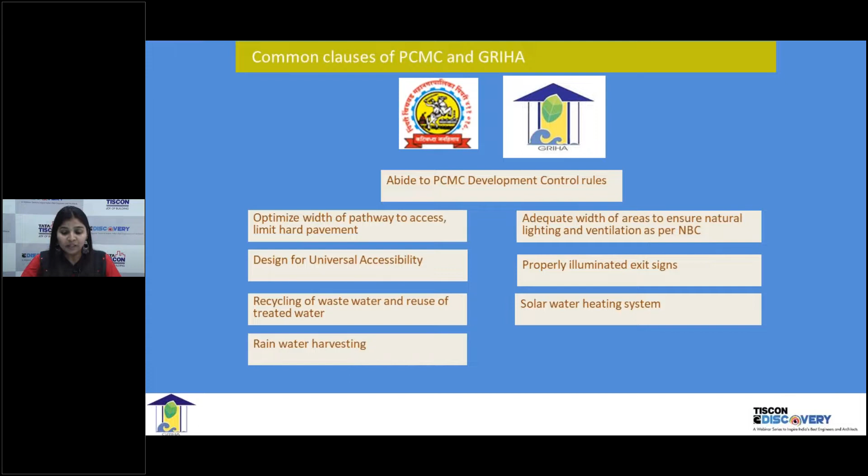The first symbol is of PCMC, Pimpri-Chinchwad Municipal Corporation. They have incentivized GRIHA and SVAGRIHA projects where they give financial incentives to the builder as well as the occupants of the flat. So if you look, there are a lot of synergies here.

Even in ECBC, whatever is mandatory is also in GRIHA. And the initiatives taken at central level and state level have also, in some way or the other, been integrated into the rating system. So we are almost there. If you look at the different sections, we are almost there. It's just a little bit of effort that you need to take to make it 100% green.

Now, a few people do tell me that the documentation is very tedious, that a lot of documents are required in GRIHA. The answer is, we are very logical in doing that. We don't ask you for multiple documents, but precisely what you need to submit to prove your claim.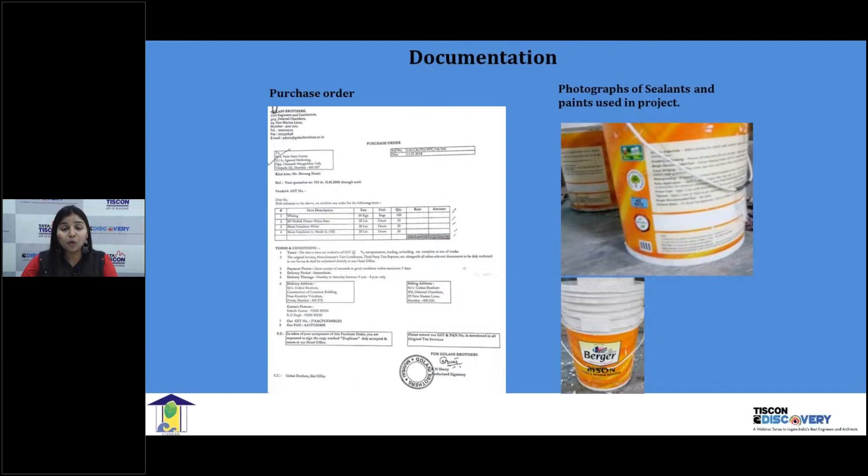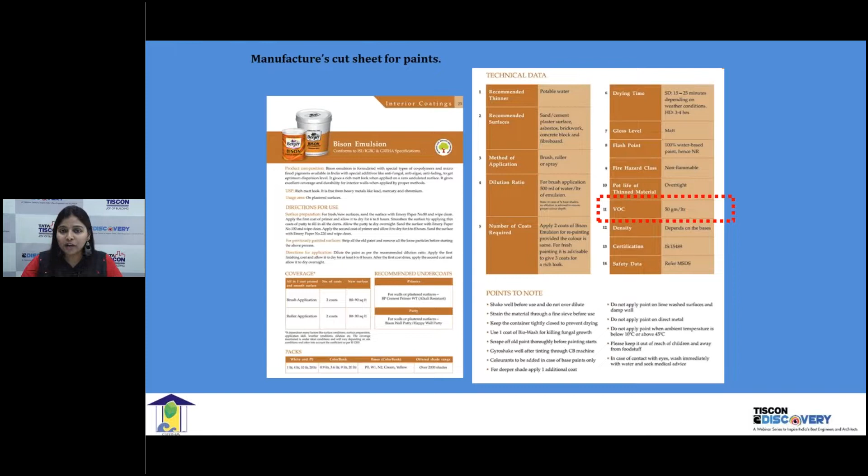For instance, if you're saying that you have used low VOC paint, then you've got to prove it to me. What you will do is submit a purchase order stating that you have purchased a low VOC paint. Then I've got to see the site photographs showing you have used it on site. And lastly, the technical sheet where I should see the VOC value. So here, the red box says that the VOC value is 50 grams per liter, which matches my threshold, and so you get a point here. So in terms of documentation, it has to be logical, just that you have to prove your claims.

Now, do you pay anything extra? In GRIHA and SWAGRIHA, we lay a lot of emphasis on cost-effective strategies. The very logical thing to do when you are designing is to optimize your demand.

We lay a lot of emphasis on cost-effective strategies. To give you a quick idea of the finances, this is a residential building in Pune which could save 8% of the project costs. An 8% reduction in the project capital cost is a huge amount, friends, believe me. And on top of that, they got a 30% discount in the premium amount paid to the municipality. So this was a very lucrative incentive for the developer.

And for the occupants, they got a 5% discount on the property tax. So it's a beautiful site to go and visit. And of course, these incentives: in Pimpri Chinchwad and Pune region, you get up to 50% discount in the premium amount, and up to 15% discount in the property tax that is paid.

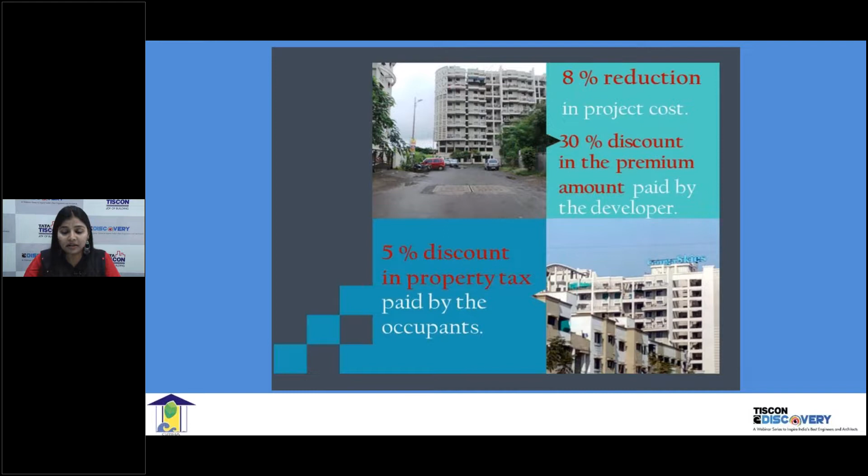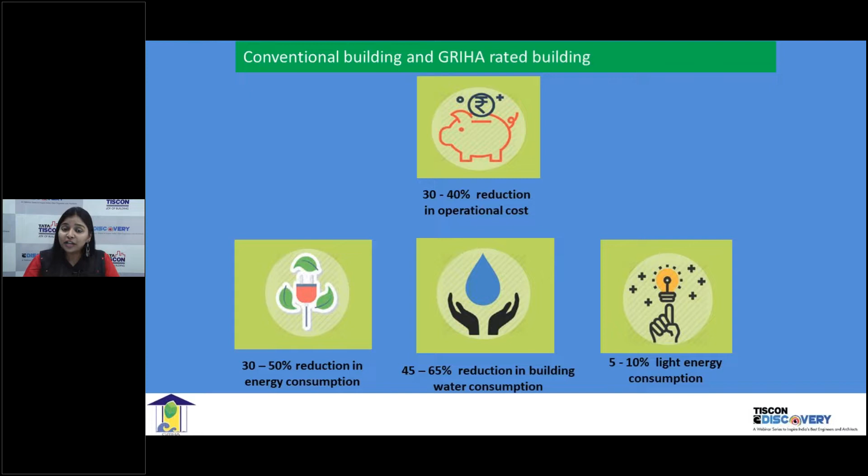So these are the general savings one can have: 30 to 40% reduction in operational cost, 30 to 50% saving in energy consumption, up to 65% water reduction possible, and 5 to 10% energy saving possible.